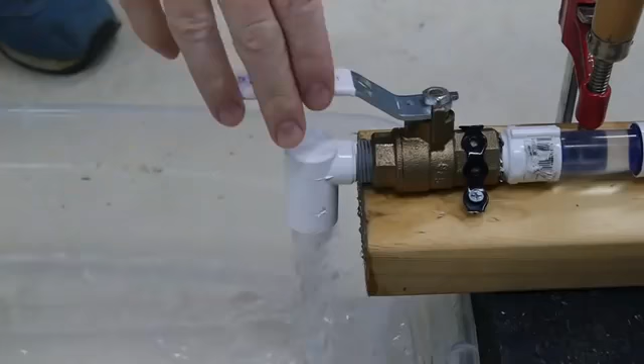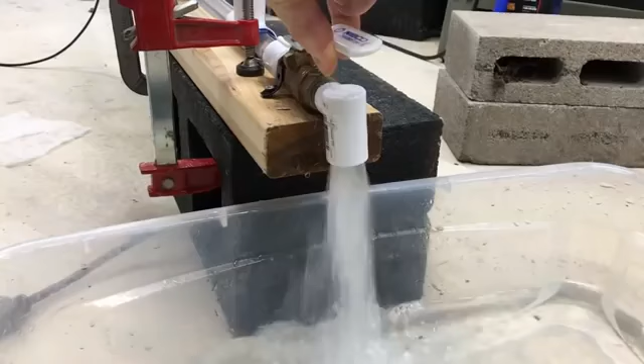It's easy to forget how heavy water is since we hardly ever carry more than a few ounces at a time. But if you add up all the water in the pipelines of your city, or even just the pipes in your house, it makes up quite a bit of mass. And when all that water is moving through a pipe, it has quite a bit of momentum. If you suddenly stop that movement, for example by quickly closing a valve, all that momentum has nowhere to go.

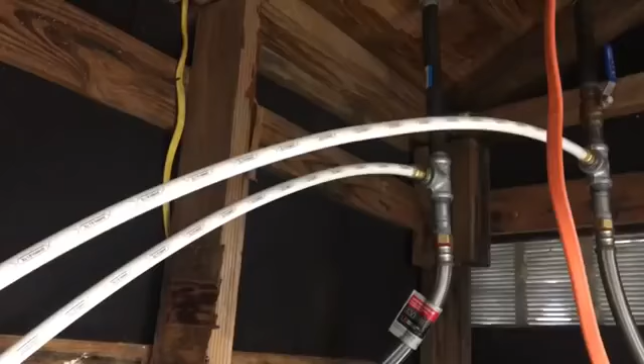Since water isn't compressible or springy, it can't soften the blow. You might as well be slamming concrete into the back of the valve and the walls of your pipe. Instead of being absorbed, that sudden change in momentum creates a spike in pressure that travels as a shockwave through the pipe. Sometimes you'll even hear this shockwave as banging in your walls when you close a faucet or run the washing machine, hence the superhero-esque nickname, water hammer.

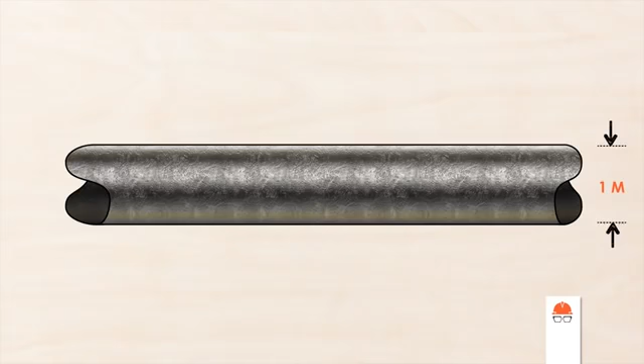Banging pipes inside your walls can sound a bit spooky, but for large diameter pipelines that can be hundreds of kilometers long, that surge in pressure from a change in momentum can cause major damage. Let's do a quick calculation. If you have a pipeline carrying water that is 1 meter in diameter and runs for 100 kilometers, a fairly average sized pipeline, the mass of water in the pipe is about 80 million kilograms. That's a lot of kilograms. In fact, it's the equivalent of about 10 freight trains.

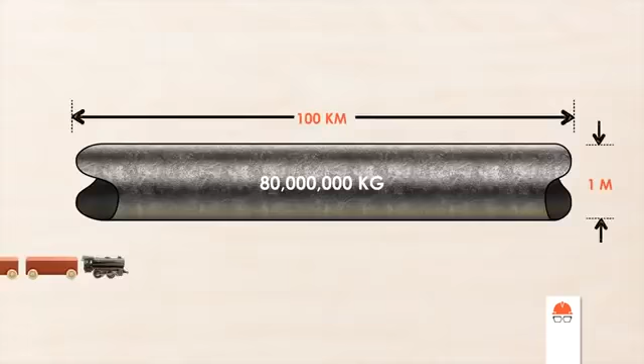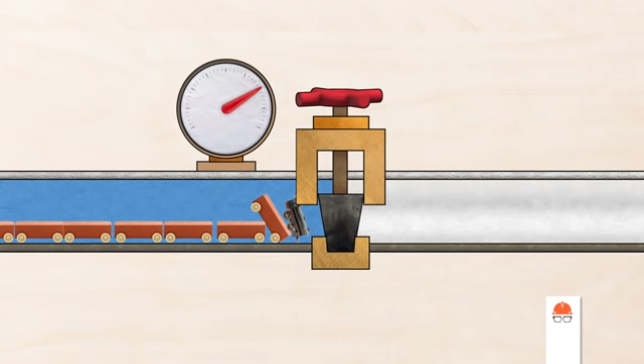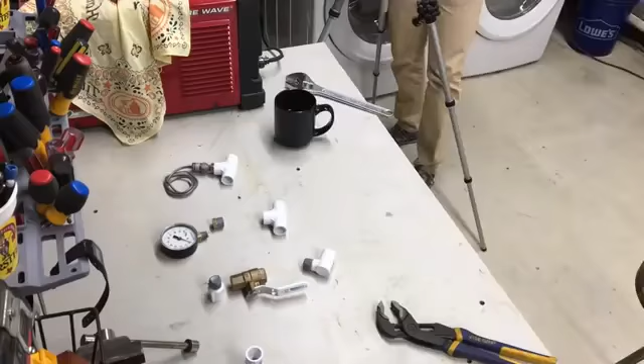Imagine you're an operator at the end of this pipeline in charge of closing a valve. If you close it quickly, you've essentially slammed those trains into a brick wall, and the pressure spike that results from such a sudden change in momentum can rupture the pipe or cause serious damage to other parts of the system. There's actually another term for when a large spike in pressure ruptures a sealed container, a bomb. And water hammer can be equally as dangerous. So how do engineers design pipe systems to avoid this condition? Let's build a model pipeline and find out.

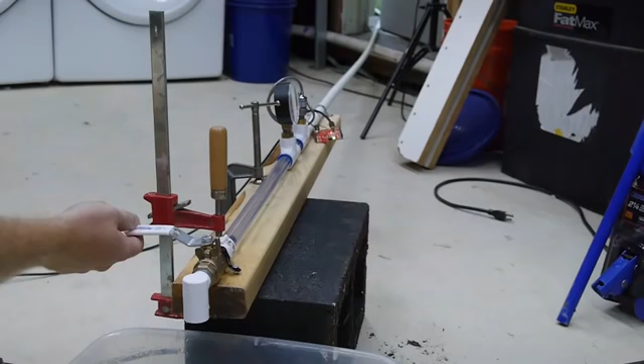Here's my setup. I've got about 100 feet or 30 meters of PVC pipe connected to the water on one end and a valve on the other. I also have an analog and digital gauge so we can see how the pressure changes, and a clear section of pipe in case anything exciting happens in there. I mean civil engineering exciting, not like actual exciting. Watch what happens when I close this valve.

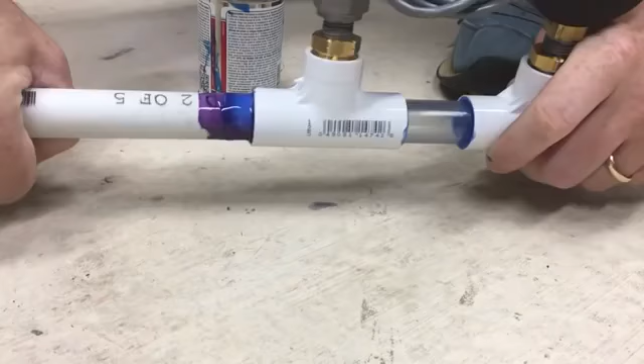We're not going to do any calculus here, but the terms of this equation show the parameters that can be adjusted to dial back these damaging forces. And the first one is obvious. It's the speed at which the fluid is moving through the pipe. Reducing this is one of the simplest ways to reduce the effect of water hammer.

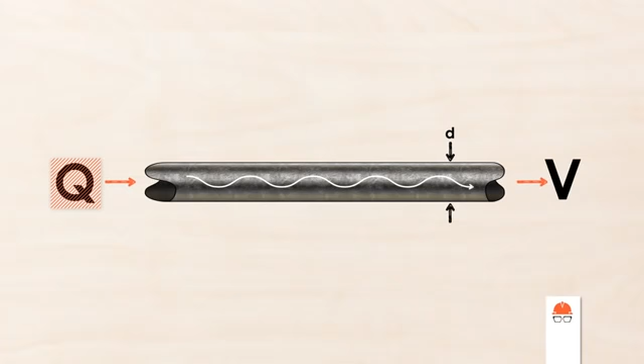Velocity is a function of the flow rate and the size of the pipe. If you're designing a pipeline, the flow rate might be fixed so you can increase the size of your pipe to reduce the velocity. A smaller pipe may be less expensive, but the flow velocity will be higher, which may cause issues with water hammer. In this case, my pipe size is fixed, but I can reduce the flow rate to limit the velocity. Each time I reduce the velocity and close the valve, the resulting spike in pressure decreases.

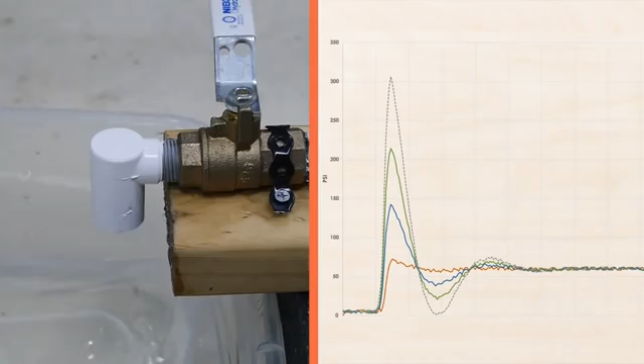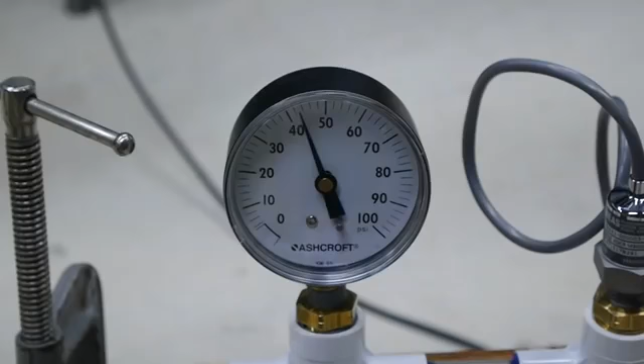Next, you can increase the time over which the change in momentum occurs. One common example of this is adding flywheels to pumps so they spin down more slowly rather than stopping suddenly. Another example is just to close valves more slowly. If I gently shut the valve rather than allowing it to snap shut, the pressure changes are more subtle.

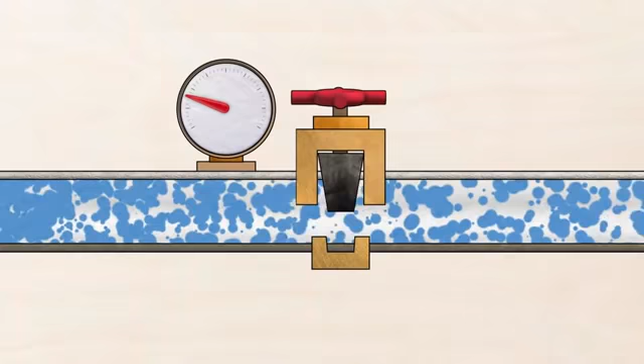On large pipelines, engineers not only design the components, but develop the requirements for operation of the equipment. This will almost always include rules for how quickly valves can be opened or closed to avoid issues with water hammer.

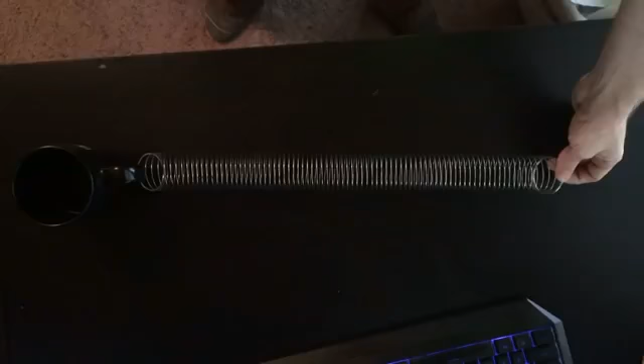The final parameter we can adjust is the speed of sound through the fluid, also known as wave celerity. This describes how quickly a pressure wave can propagate through the pipe. The wave celerity is an indirect measure of the elasticity of the system, and it can depend on compressibility of the fluid, the material of the pipe, and whether or not it's buried in the ground. In a very rigid system, pressure waves can reflect easily without much attenuation.

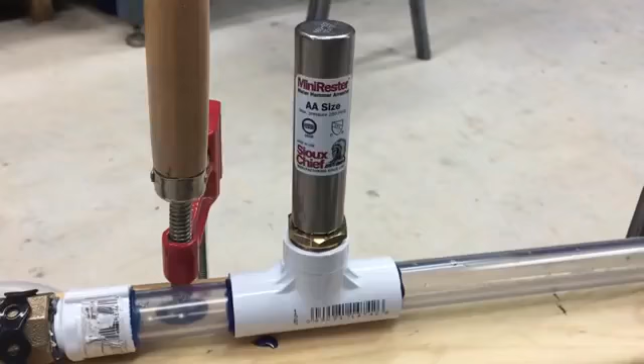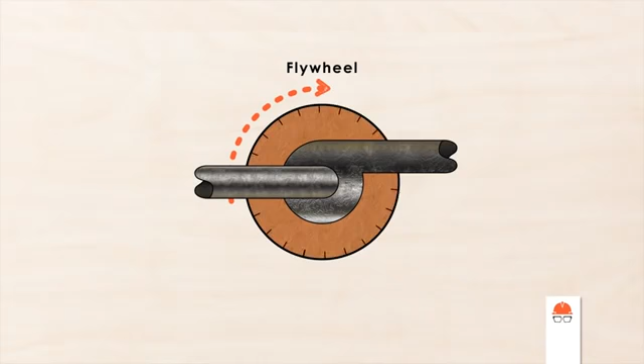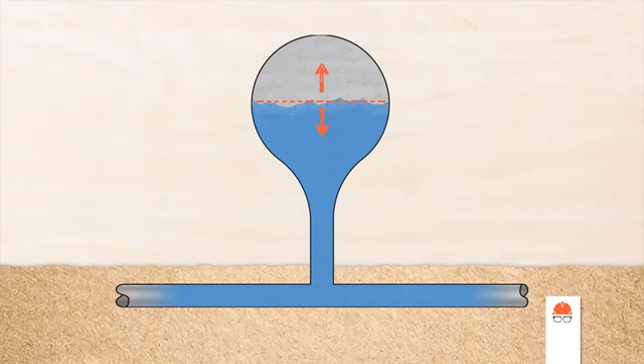I've got flexible PVC pipes sitting on the ground free to move, which is already helping reduce the magnitude of the water hammer. I can increase the flexibility even more by adding an anti-surge device. This has an air bladder that can absorb some of the shock and reduce the pressure spike even further. Anti-surge devices are very common in pipe systems, and they can be as simple as spring-loaded valves that open up if the pressure gets too high. In water distribution systems for urban areas, water towers help with surge control by allowing the free surface to move up and down, absorbing sudden changes in pressure.

Plumbing is one of the under-acknowledged innovations that has made our modern society possible. But when you harness the power of water by putting it in pipes, it's easy to forget about that power altogether. Water can be as hard as concrete when confined, and if you bang two hard things together, eventually something's gonna break. If you're an engineer, your job is to make sure it's not the expensive infrastructure you designed. Part of that means being able to predict surges in pressure due to water hammer, and design systems that can mitigate any potential damage that might result.